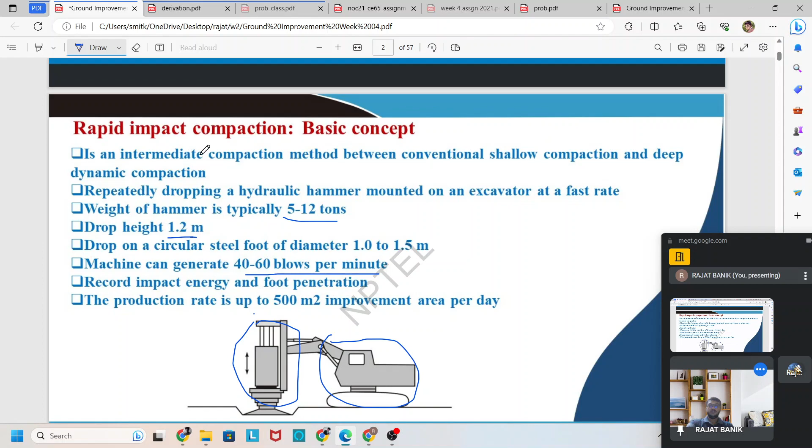We achieve our targeted improvement very rapidly, with blow rates of 40 to 60 blows per minute at one point. So the energy transfer is very high, and the ground is quickly improved to that depth. This method is very suitable in terms of cost when the available construction time is very less, so we can apply this type of test, the rapid impact compaction.

Coming to the next slide, we discuss the suitability, application, and advantages and disadvantages. It is suitable for granular geomaterial, meaning cohesionless geomaterial like gravel, sand, or uncontrolled fill, and also sometimes industrial and mine waste, used to minimize the collapsible potential of the loess.

When we apply the rapid impact compaction test, we stabilize the ground through vibration. We rapidly impact one point, generating vibration there. Through vibration, if there is any potential for the soil to collapse, as in the case of loose soil, we stabilize the ground before construction through vibration, so after construction there is no possibility of collapsible soil behavior. For that reason, this test is very suitable.

This test is also suitable when we want to improve the ground up to 6 meters deep. When our target is 6 meters, or commonly 3 to 4 meters, then we can use this type of test.

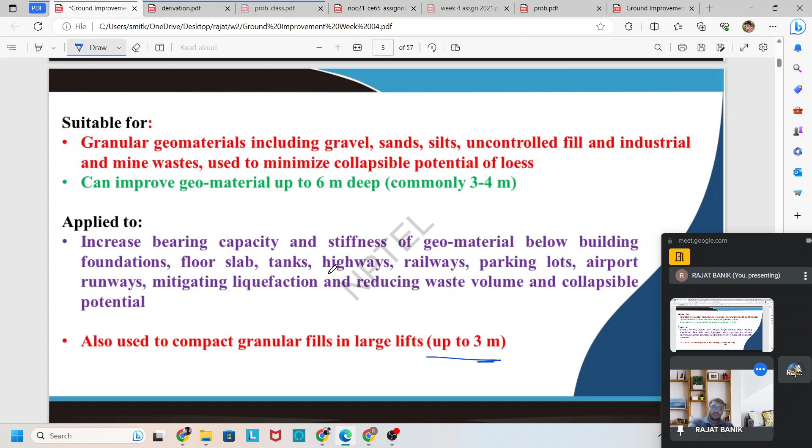Coming to the next slide, it is discussed here the advantages and disadvantages. In advantage, it is said that it is very fast and much more controlled compared to deep dynamic compaction. Fast in the sense that we are applying the energy very fast, by 40 to 60 blows per minute, so it is very fast as compared to the deep method.

It can take one blow and then another blow in between. Then we take 5 to 10 minutes to arrange this test again.

Then it is a much more controlled way. Why is it a more controlled way? The arrangement of this instrument is very small, and the impact point is fixed through a steel plate, and we impact the energy above this steel plate only. So we can already decide, and due to the drop height being very less, we are actually generating a specified point. The energy is transferred through a specified point, so this is the fixed point through which we transfer the energy.

But in case of deep dynamic compaction, a very large arrangement is required, and also the height of fall and weight is very large. So it may not be possible that the impact point remains the same as already defined for the next drop. So in this case, rapid impact compaction fulfills our requirement as it is fast and much more controlled.

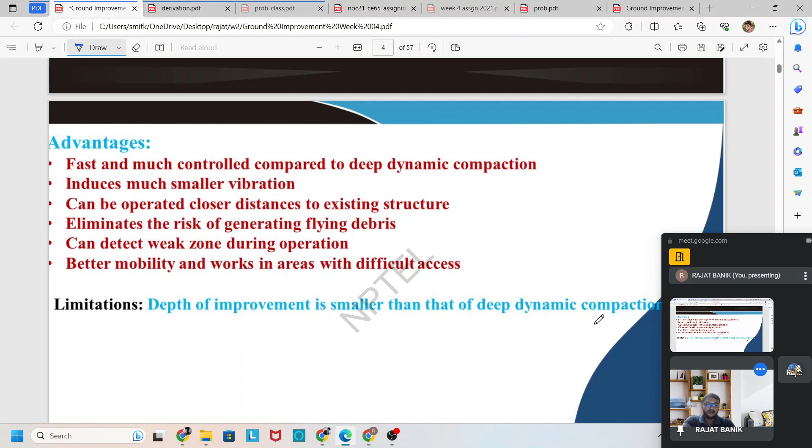Coming to the next slide, we now discuss the design considerations: what are the different aspects regarding designing the rapid impact test.

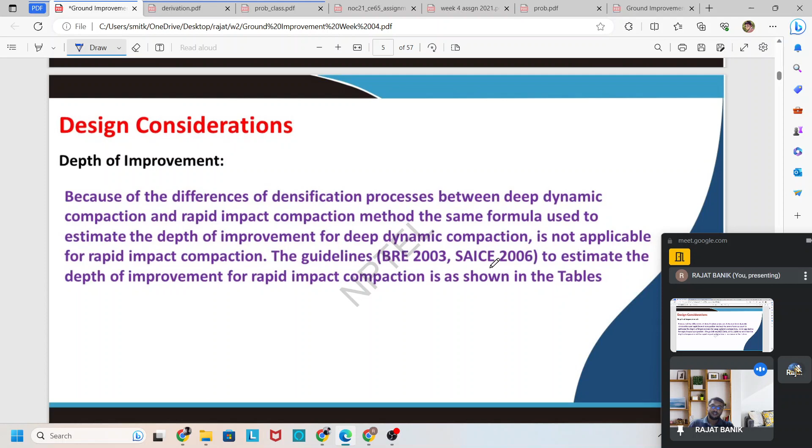The first one is depth of improvement. Because the technique and procedure is different from deep dynamic compaction, the rapid impact depth of improvement is different, and the same formula used in deep dynamic compaction is not used. Because of this, a different procedure and technique is used to densify the soil in rapid impact compaction. But there are one or two guidelines to estimate the depth of improvement, given by BRE 2003 and SAICE 2006. In the next table, to find the depth of improvement for different geomaterials, a table is given showing how much applied energy is required to achieve that depth of improvement.

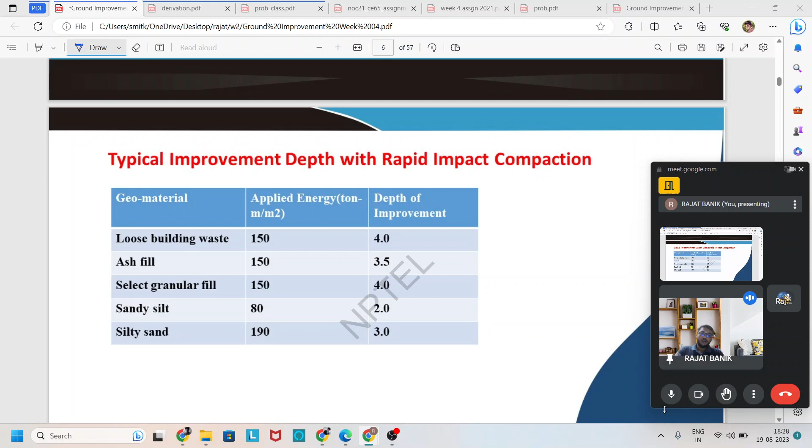The first one shown is loose building waste: the applied energy is about 150 and the depth of improvement is about 4 meters, all units in meters. In ash fill, the applied energy required is 150 to improve the ground up to 3.5 meters. For granular fill, the applied energy is also 150, but the depth of improvement is 4 meters.

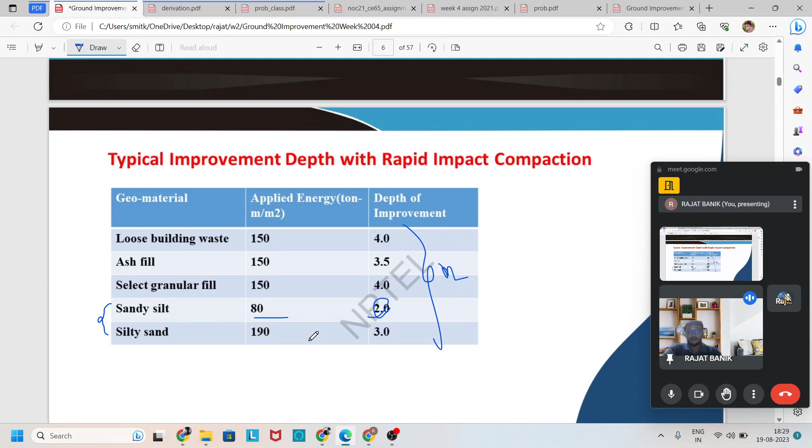For sandy silt, don't confuse it with silty sand — both are different in nature. In sandy silt, an applied energy of 80 ton-meter per meter square is required to improve the ground up to 2 meters. In silty sand, it requires up to 190 ton-meter per meter square to improve the ground up to 3 meters. So by this table, we decide our targeted improvement area for the given geomaterial, and then apply that much energy by weight and drop height to the ground.

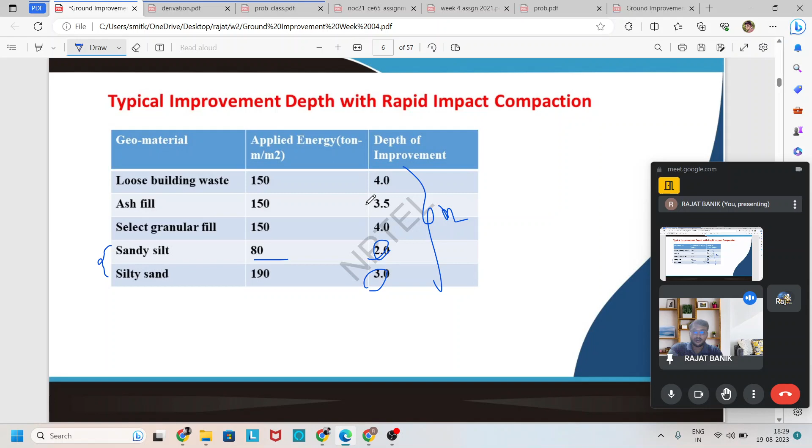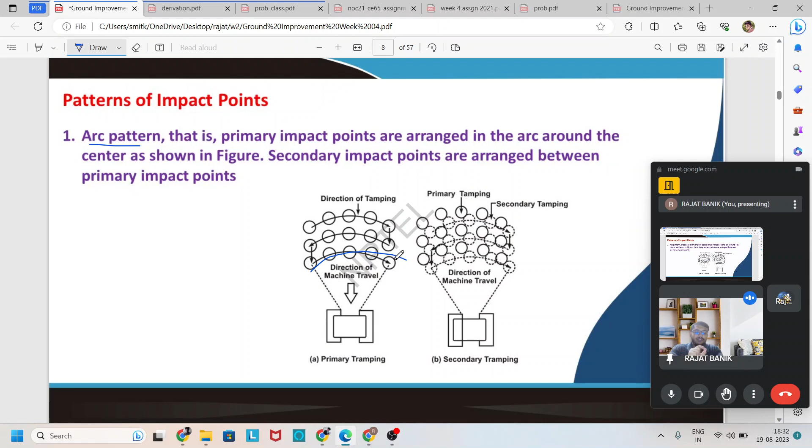After that we apply the secondary pattern, in between the primary pattern, and secondary points are generated like this. Then we apply tertiary points, in between the secondary impact points, like that.

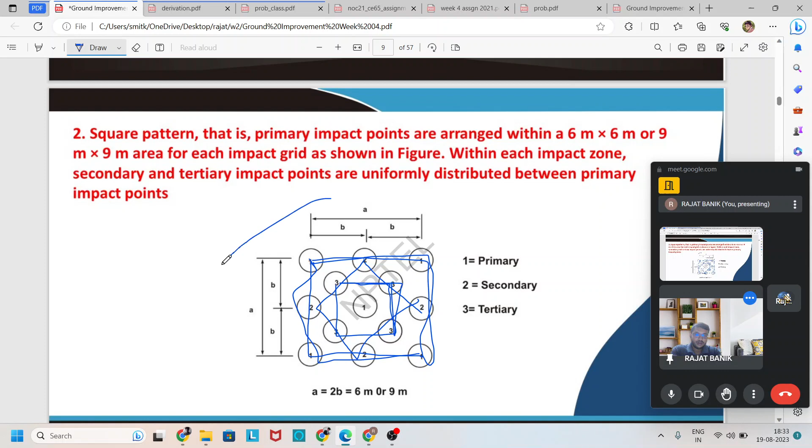So an area of A by A meters is improved. Like that, another A by A area is improved, and continuously we keep improving the ground till the whole area is covered.

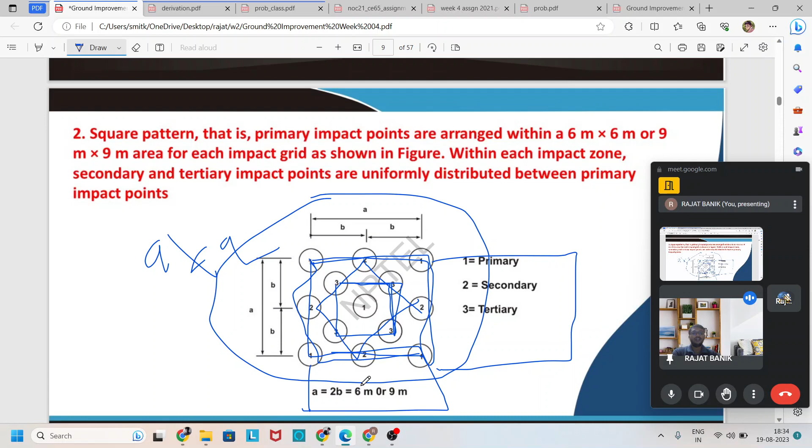Then you can see this another type of pattern: it is a triangular pattern, like that.

It is said that no ironing pass is needed in rapid impact compaction, since rapid impact compaction is similar to dynamic compaction but with low energy and close spacing. However, for leveling purposes and densifying the geomaterial near the surface, compaction by roller is often needed.

That means it is said that no ironing pass is needed here, which is needed in deep dynamic compaction. In deep dynamic compaction, the applied energy is very large and the spacing between impact points is also large, so there is a crater formed which is quite deep below the surrounding ground. So we need the ironing pass to level the ground for deep dynamic compaction.

But in case of rapid impact compaction, we apply a steel plate on the ground and then above the steel plate we apply the energy, and the spacing between impact points is also less than in deep dynamic compaction. So the distribution of energy is quite uniform, and the ground depression is also quite uniform.

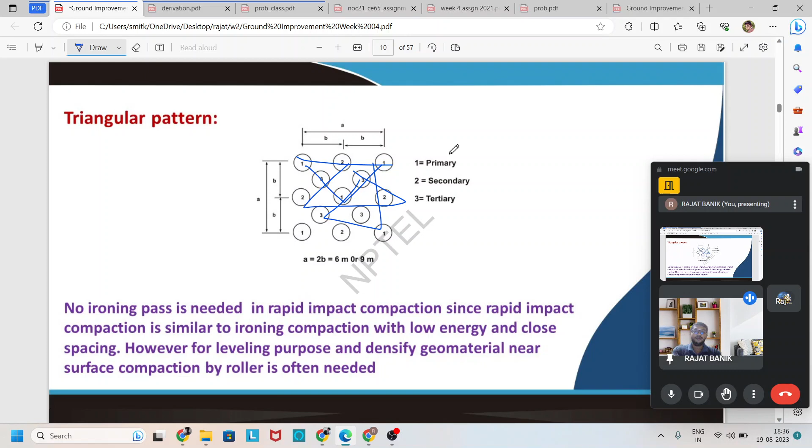Coming to the next slide, another design aspect is the number of blows. We can find this out using an equation already given, which is the same as for deep dynamic compaction. We have already seen this type of formula.

By this formula, we can easily find out how many drops are needed for one impact point for a particular applied energy. To determine the number of drops, we need to know what type of soil is present, how much energy is needed to achieve the targeted improved depth, how much weight is used for the applied energy, and what the height of fall is.

We also consider the equivalent influence area, meaning how much area is covered and compacted by that much energy. So by this we can easily find out how many drops are needed.

That means the applied energy equals the number of drops times the height of fall of the hammer, divided by the influence area. The influence area is nothing but the spacing squared, if we apply the square pattern. So by that we can easily find out the number of drops.

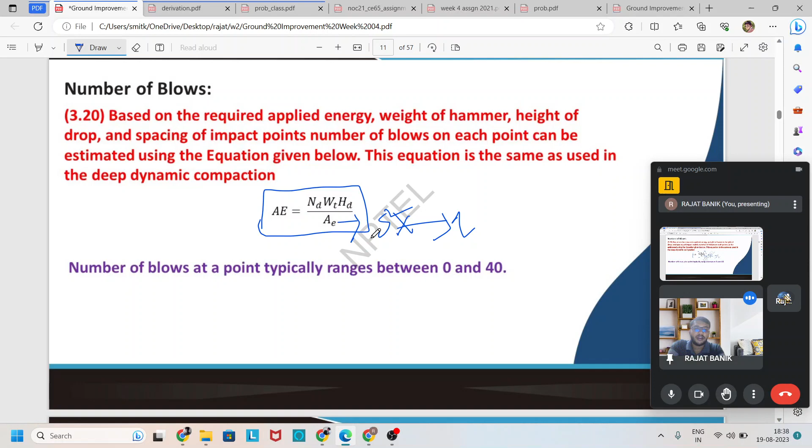We can see that, we already discussed about that. So we easily understood or we easily shown that by this formula we can easily find out the number of blows per minute, or what are the blows for per impact point, how much blows are needed.

Coming to the next design consideration, this is groundwater. Groundwater is also most important for the different types of ground improvement technique. Here also it is a governing factor because like deep dynamic compaction, groundwater is problematic, and it is also problematic to the rapid impact compaction.

It is because when we apply the energy to the field, if the ground is saturated or if the groundwater table is close to the ground, there may be seeping out of water from the ground due to the applied energy or vibration. So this may not be suitable for the construction site. We need to dewater the ground before applying the rapid impact compaction test. But if the groundwater table is below 1 meter depth, then this technique is quite suitable.

So it is said that, as in deep dynamic compaction, a high degree of saturation geomaterial near the ground surface affects the rapid impact compaction, and the depth of groundwater table at 1 meter is the minimum requirement for rapid impact compaction. If the groundwater table is too close to the ground surface, dewatering or additional fill should be implemented prior to the compaction to suit the construction requirement.

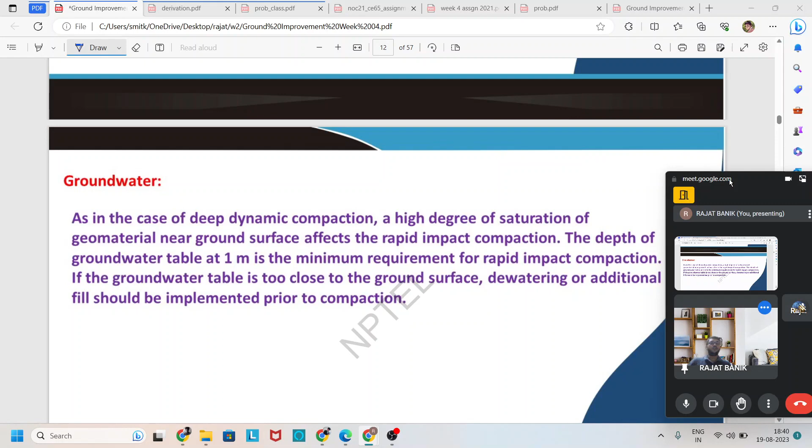Coming to the next slide in module 4, lecture 17, here it is given that, like other deep dynamic compaction, here also we consider the environmental impact. That means we consider the vibration and noise - how much vibration or noise is created during this rapid impact compaction, and whether it is suitable to the adjacent site, construction site, or structure or not.

Based on that, we conduct the rapid impact compaction test. If it is exceeding and does not fulfill our requirement, then we terminate the rapid impact compaction test. So it is found out how the environmental aspect is based on vibration and noise - it is found out based on peak particle velocity.

The peak particle velocity is generated when the vibration is created. So based on some empirical formula, we can find out or define the peak particle velocity. So here it is said that, like deep dynamic compaction, rapid impact compaction on ground induces environmental impact, mostly vibration and noise. This fact has to be considered in the selection of a suitable ground improvement technique.

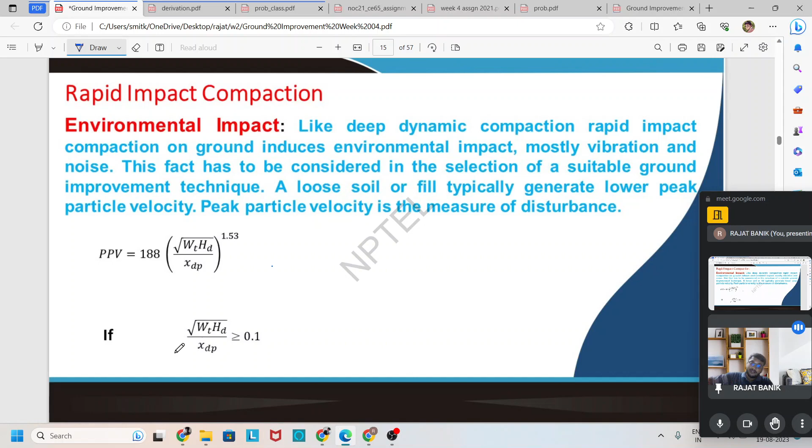So if you can see the term in the bracket, this is called the scale energy factor. When the scale energy factor is more, we can easily say, based on this formula, that the peak particle velocity also increases. Two formulas are used based on the scale energy factor. When the scale energy factor is greater than or equal to 0.1, we apply the first formula: peak particle velocity equals 188 times scale energy factor to the power 1.53. If it is less than 0.1, we use another formula: 36 times scale energy factor to the power 0.79.

Give me some seconds, I will join.

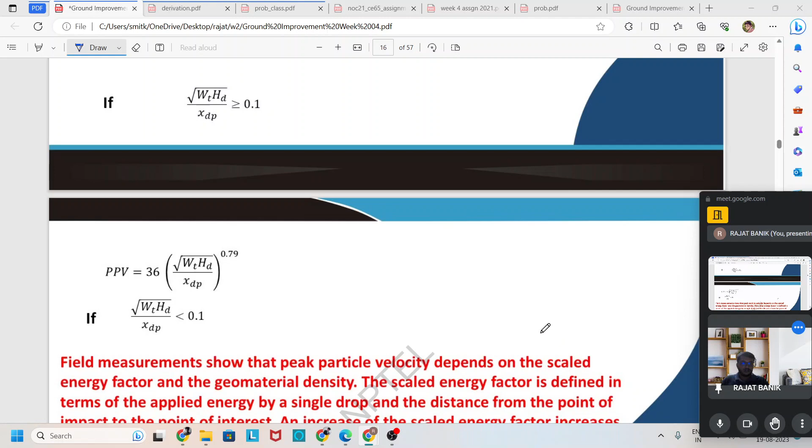Sorry for the interruption. So what I discussed here is about peak particle velocity. By scale energy factor, we easily find out the peak particle velocity based on two empirical formulas. If the scale energy factor is greater than 0.1, then we use the first one. If it is less than 0.1, we use the second one.

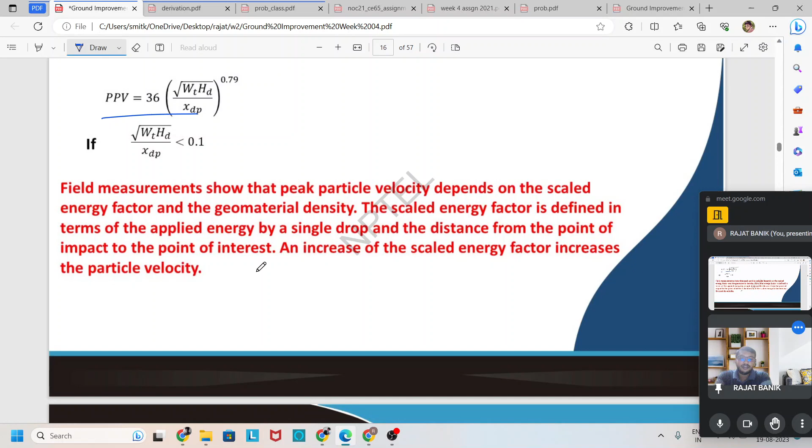So here is one point about peak particle velocity - it depends on the scale energy factor and the geomaterial density. That means if the sand is very dense, then it transfers very high energy to the surrounding soil.

If it is loose, then the energy transfer is less. Based on the scale energy factor, if the height of drop and weight of hammer is large, then the energy transfer to the surrounding soil is also high. If the distance between the impact point and the surrounding structure is less, the transfer energy is also very high. So the peak particle velocity mainly depends on the scale energy factor and geomaterial density.

The scale energy factor is defined in terms of the applied energy by a single drop and the distance from the point of impact to the point of interest. As the scale energy factor increases, the peak particle velocity increases. This is clearly seen through this formula.

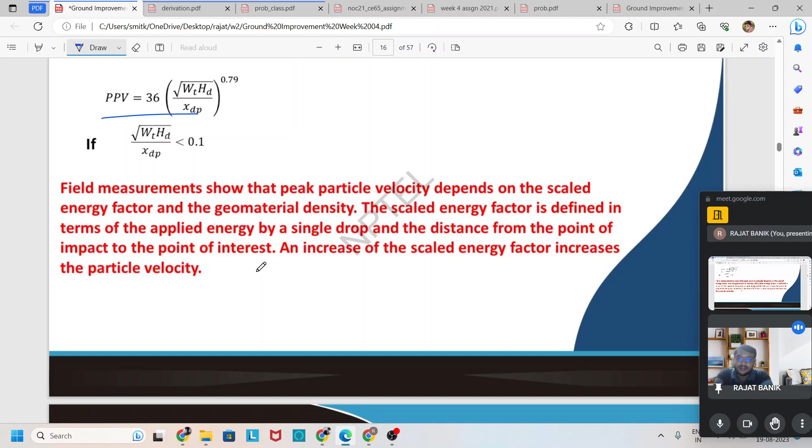In the next slide, there are some points about peak particle velocity. The first is that the scale energy factor is greater than 0.1 for most rapid impact compaction. Comparison between the equations for the two cases shows that rapid impact compaction produces greater peak particle velocity than deep dynamic compaction at the same scale energy factor.

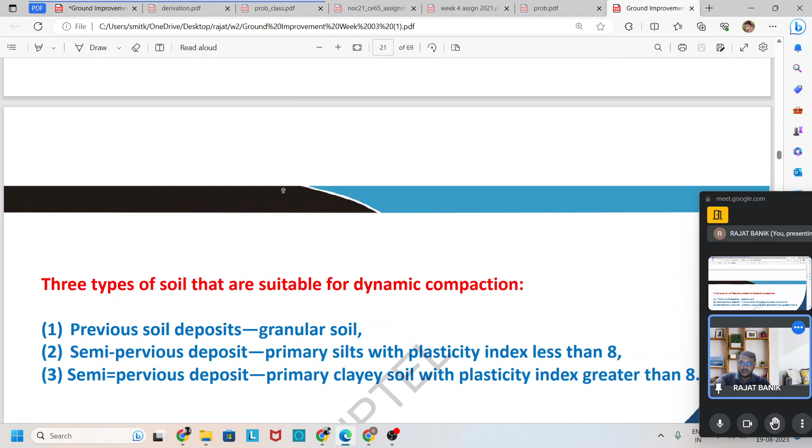That means, if you remember from previous lectures, we discussed the peak particle velocity formula for deep dynamic compaction. Let me take a moment to go through that previous formula. Please wait a few seconds.

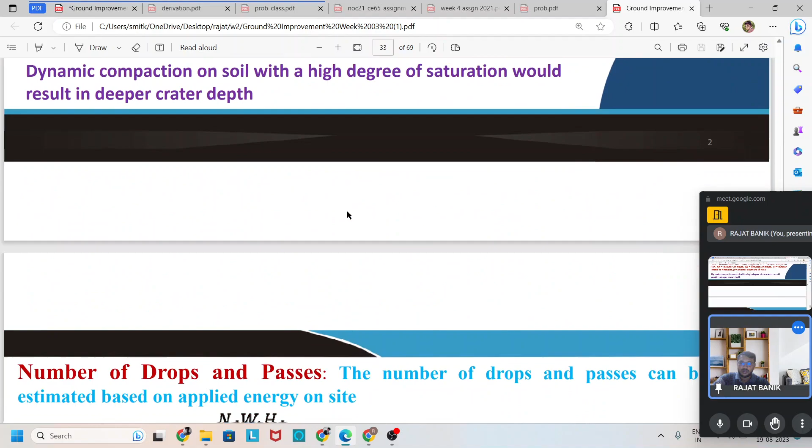For deep dynamic compaction, the formula is the scale factor to the power 1.4, multiplied by 70. But in case of rapid impact compaction, the formula is the scale factor to the power 1.53, multiplied by 188.

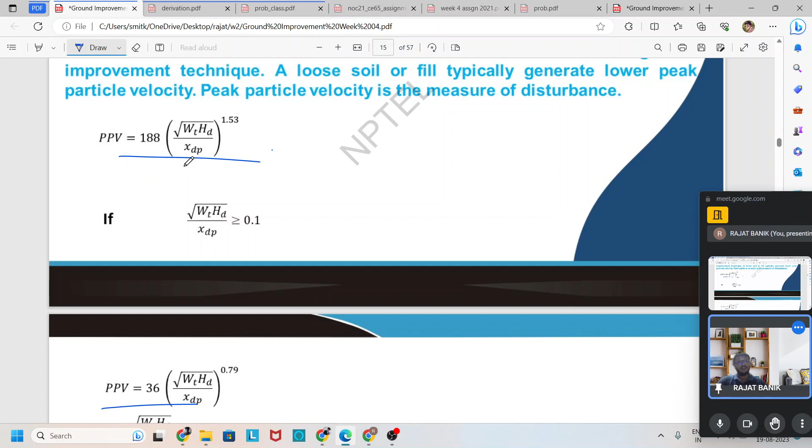So if the scale factor is the same for both cases, the peak particle velocity generated by rapid impact compaction is greater than that of deep dynamic compaction, for the same scale factor. Based on this formula, we can easily say this.

The second point discusses that the greater peak particle velocity induced by rapid impact compaction results from the fact that the steel foot is always in contact with the ground. This transfers the impact energy to the ground more efficiently.

If we don't apply the steel plate, the ground surface is quite undulated, not level. So when applying the hammering, due to this improper leveling of the ground, the applied energy is not uniformly distributed to the surrounding ground. If we apply the steel plate before hammering, it distributes the energy uniformly to the ground, so more energy is transferred. The test is more efficient than when we don't use the steel plate.

So it should be remembered that during this test, the steel foot is always in contact with the ground. The third point compares this with deep dynamic compaction, stating that rapid impact compaction produces greater peak particle velocity than deep dynamic compaction at the same scale factor.

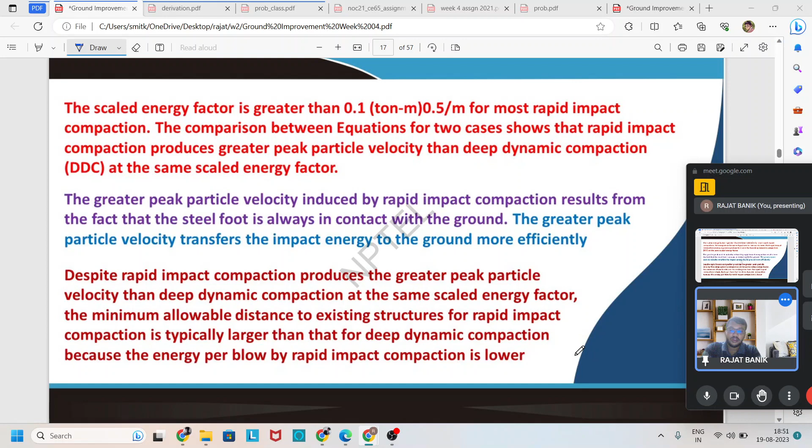Coming to the next slide, one person has reported that the induced vibration frequency ranges from 9 to 15 Hz for the rapid impact compaction test, but in case of deep dynamic compaction test, it is between 6 to 10 Hz. So we easily see that due to the induced vibration, the frequency is higher than deep dynamic compaction in case of the rapid impact test. Due to high frequency, we know that less vibration is generated, so we can easily use this test very near to the existing structure to improve the ground.

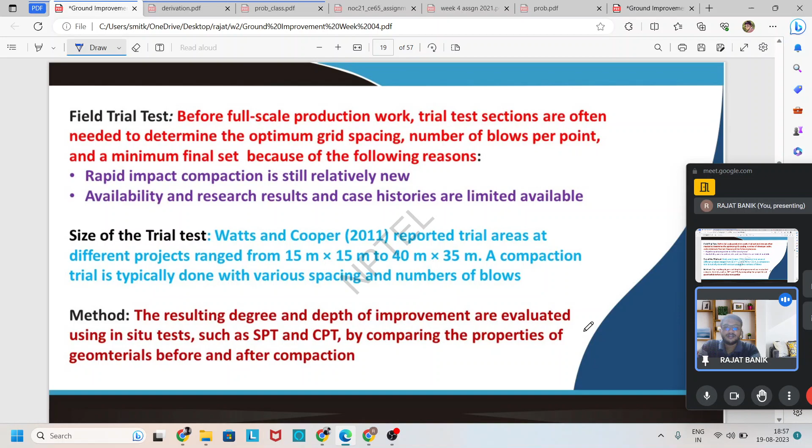So like this, through field trial tests, we decide our spacing, number of blows, and minimum final set for the rapid impact compaction test.

Coming to the next slide, here different types of design parameters are given, which govern the rapid impact test.

There are few points discussed here. One is geomaterial type. We already discussed in the first slide that this method is suitable for granular material, that means cohesionless soil. It is not suitable for fine grained soil. Why is it not suitable?

Because due to the vibration, in cohesionless soil the particle to particle friction or attraction is less, so when we apply the rapid impact test, it is more suitable for cohesionless soil. But in cohesive soil, the particle to particle friction or force is more. So applying the rapid compaction test is not suitable to overcome this particle to particle attraction force. So the rapid compaction test depends on the geomaterial type.

Then, as the second point, the depth of groundwater table also influences the rapid impact test. We know that if the depth of groundwater table is near to the ground surface, there may be some problem. After applying the rapid impact test, water may come out from the ground, making it difficult to handle the instrument at the construction site. So this is also a governing factor. Before doing the rapid impact compaction test, we need to dewater the site.

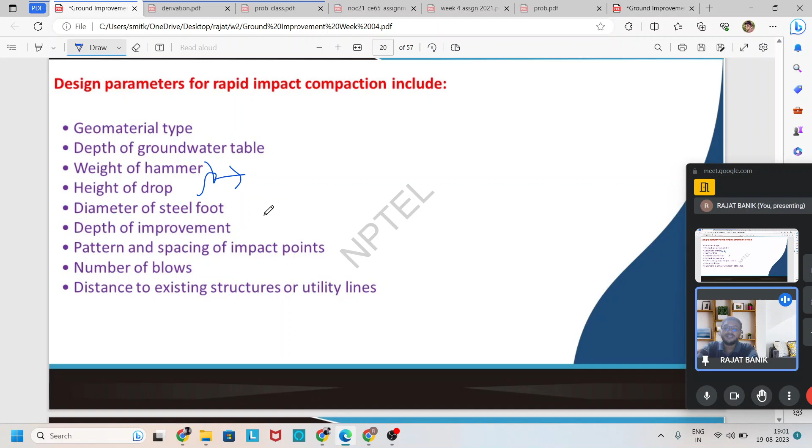Then there is the distance to the existing structure or utility lines. Since the rapid impact compaction test generates less vibration, we can easily use this test very near to existing structures. So this is also a governing factor.

The first procedure is to determine whether the rapid impact compaction is suitable. This is determined by whether our depth of improvement is between 4 to 6 meters, and whether the geomaterial type is suitable, that is granular or cohesionless soil. If so, then we apply this test.

Then we select the depth of improvement, how much depth we need, whether it is 6 meters or 4 meters. If it is 6 meters, more applied energy is required. If it is 4 meters, less applied energy is required compared to the 6 meter depth of improvement.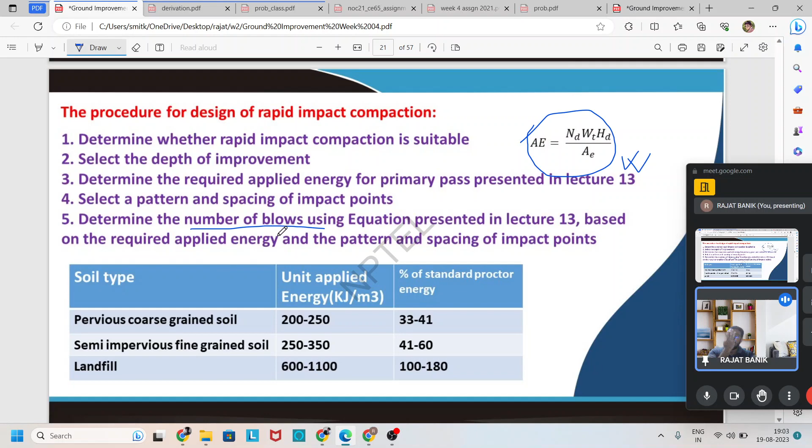In the next slide, after determining the number of blows, for safety purposes we determine the peak particle velocity using the scale energy factor, to check whether the peak particle velocity exceeds our targeted value or not. If it exceeds the targeted value, then the rapid impact test is terminated, meaning no further test is needed or conducted to improve the ground.

We know that peak particle velocity indirectly shows the environmental impact. We already showed one table that based on the peak particle velocity, for different structures, there is some threshold value fixed. If it exceeds this threshold value, we terminate this test. If it is in between or less than the peak particle velocity given in this table for different types of structures, then we conduct further rapid impact tests to improve the ground.

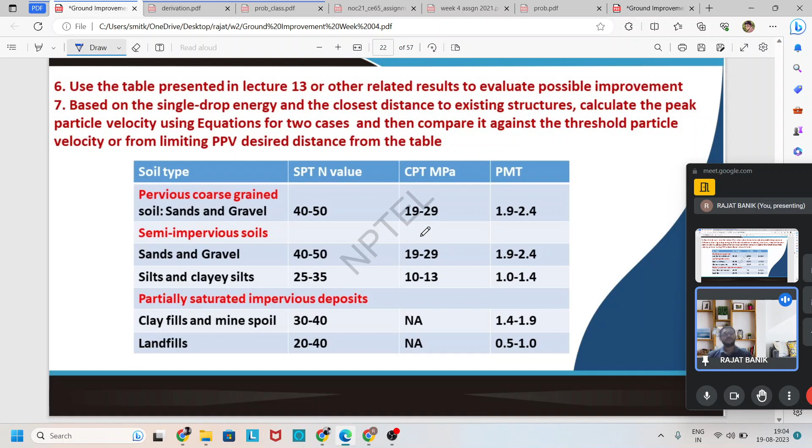So here we can see the same formula is given for peak particle velocity, and the same table is given once again. We see that if it is exceeding 19 mm per second for dry wall, the peak particle velocity test is rejected for this particular site. If it is less than 19 mm per second, then it goes for other tests, or for rapid impact to improve the ground further.

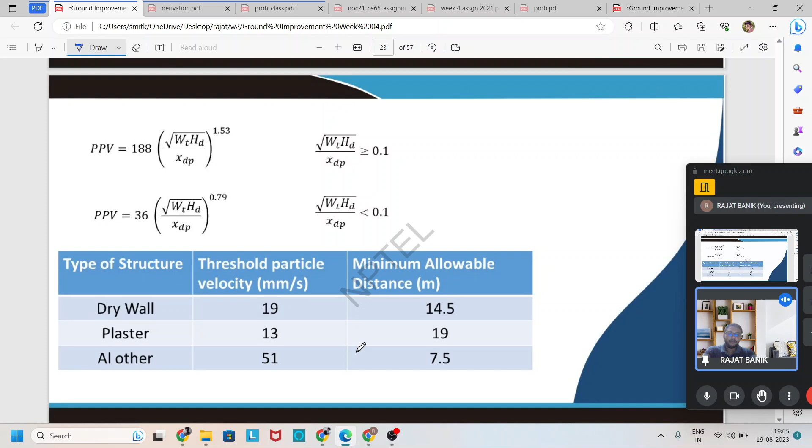So for different types of structures, different threshold values are given for peak particle velocity, and also different minimum distances are given for how much distance should be there between the impact point and the nearby structure.

So in this way, module 4 lecture 17 is completed.

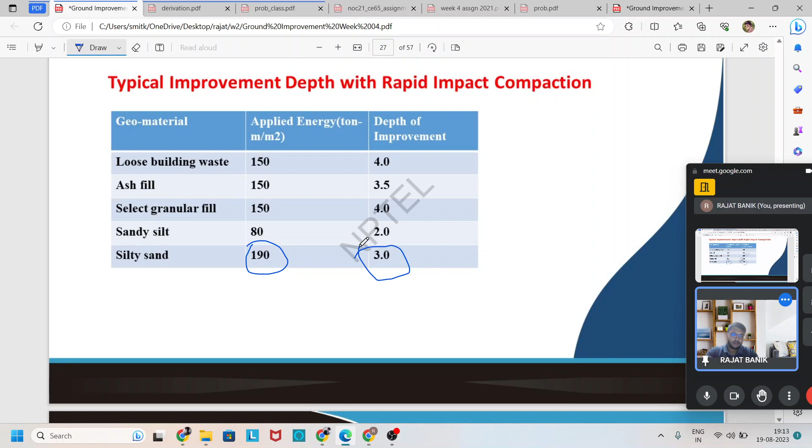To try to solve this problem, I direct you to another slide. First, you see that the applied energy, the targeted geomaterial, is our silty sand. For silty sand, impact energy is given as 190 ton-meter per meter square. But our depth of improvement is 4 meter. A table is given for silty sand - when we apply rapid impact compaction, the applied energy of 190 corresponds to a depth of improvement of 3 meter. But here it is given as 4 meter. So more energy is required as compared to the given energy.

So how do we find it? Now we direct to another slide. We find this by the unitary method. That means for 3 meter depth, applied energy is 190. Like that, for 1 meter, how much is it, and for 4 meter, what is this? It is found that for 4 meter, it is about 253 ton-meter per meter square.

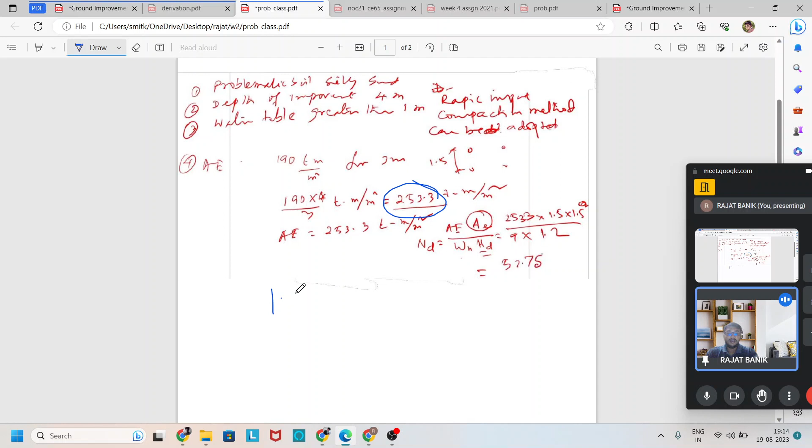And we consider that our spacing is 1.5 meter by 1.5 meter. That means from one impact point to another impact point, the center to center distance is about 1.5 meter. By this spacing, we consider a square pattern, and by this spacing we can easily find out the influence area - that means nothing but a square of the spacing. So you can easily find out.

And after that, using this influence area, we easily find out the number of drops by this formula. It is a rearrangement of this type of formula: applied energy is equal to number of drops into weight of hammer into drop height, whole divided by influence area AE. By rearranging this formula we can easily find out the number of drops. Here it is found that the number of drops is about 53 for each impact point.

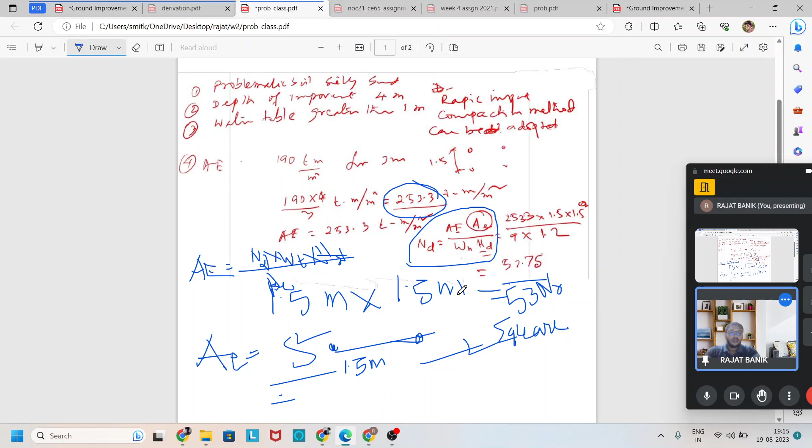Then we find out this formula for considering the environmental impact, whether this test or given problem is suitable for our existing structure or not. Here it is, if you see that the existing structure is about 7.5 meter distance.

By this distance and applied energy, we can easily find out from this formula our peak particle velocity, which indirectly gives the environmental impact through vibration and noise. We know that for all other types of structure, the peak particle velocity should be limited to 51 mm per second. But in our case, this formula gives about 53.2, which is slightly greater than the threshold value.

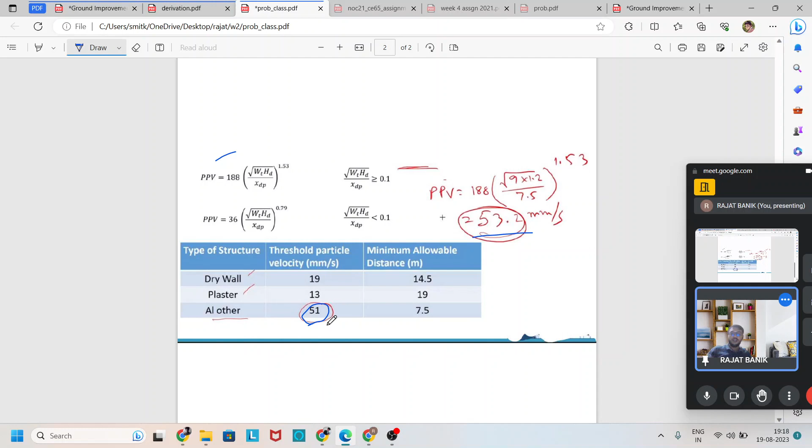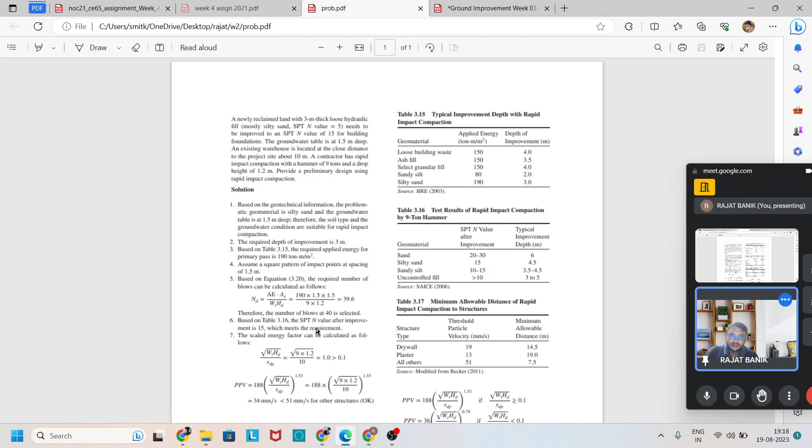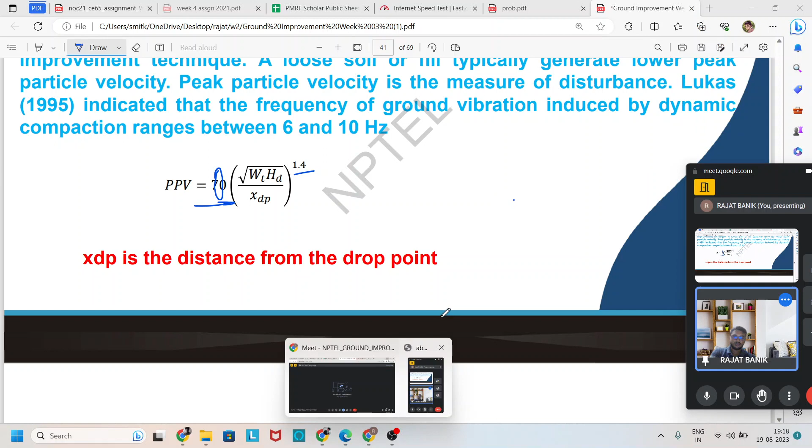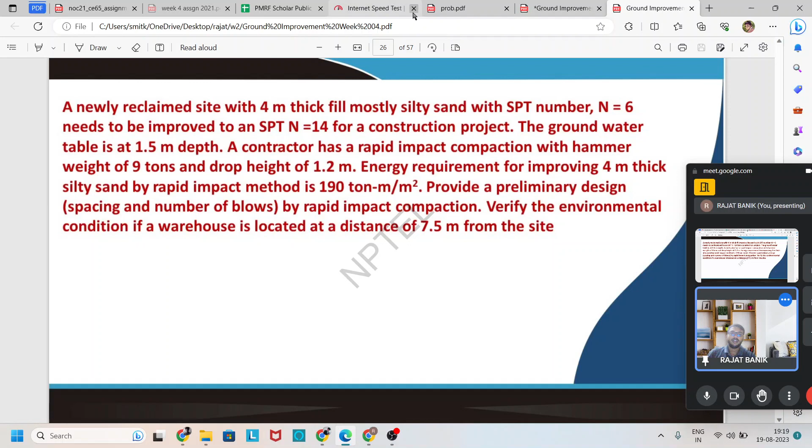Sorry about that. Sorry, I cannot find my... sorry, I mistakenly deleted or closed the tab.

So now coming to the next slide, it is about the construction - how we apply the rapid impact test in the ground. First step is we do the design, then we do the trial, and after that we discuss how it is actually applied in the field.

For construction of the rapid impact test, prior to compaction or stabilization, we need to prepare the ground. This is done by removing large objects, leveling the ground, dewatering, or filling existing ponds and depressed areas. Dewatering lowers the groundwater level if it is within 1 meter of the ground. Then leveling the site avoids ponding of water, and removal of large debris or rubble uncovered during leveling avoids interference in compaction work.

Next, we discuss building the isolation trench. This is built when the vibration due to the rapid impact compaction is quite large, to reduce or minimize transfer to the existing structure. A trench is created surrounding the test site so that the further transfer of vibration is not possible due to the gap. The trench should be 2 to 3 meters deep and 1 meter wide, built in between or surrounding the existing structure to reduce the vibration.

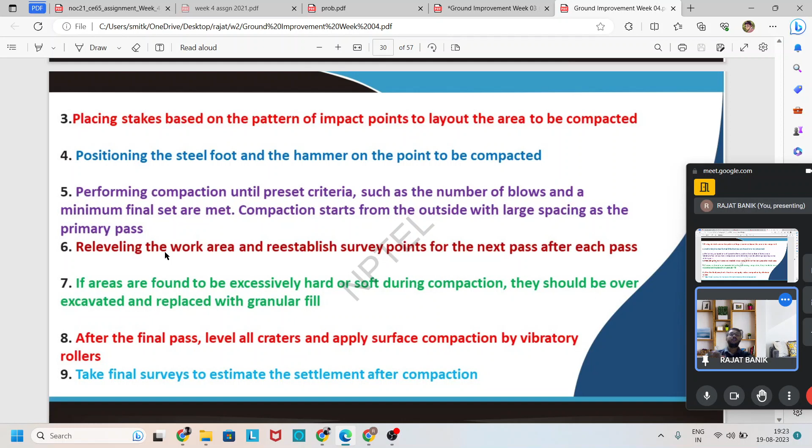After each impact point, we re-level the work area and re-establish the survey point for the next pass. If the area is found to be extremely hard or soft, we excavate it and replace it with granular fill. In the final pass, we level all the craters and apply surface compaction by vibratory roller, then take the final survey to estimate the settlement after compaction. This is how we apply rapid impact compaction in the real field.

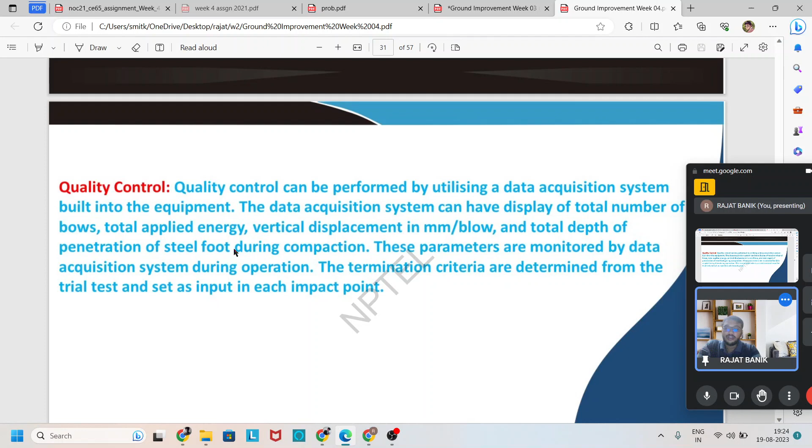Coming to the next slide, it is about quality control. During the rapid impact test, we need to check and control the quality. This is performed using a data acquisition system already built into the equipment or excavator. It records the number of blows, total energy, vertical displacement, and total depth of penetration. Using these values, we monitor our test at each point. If it matches our targeted value, we move to another point; if not, further improvement is needed. This is how we control quality on site.

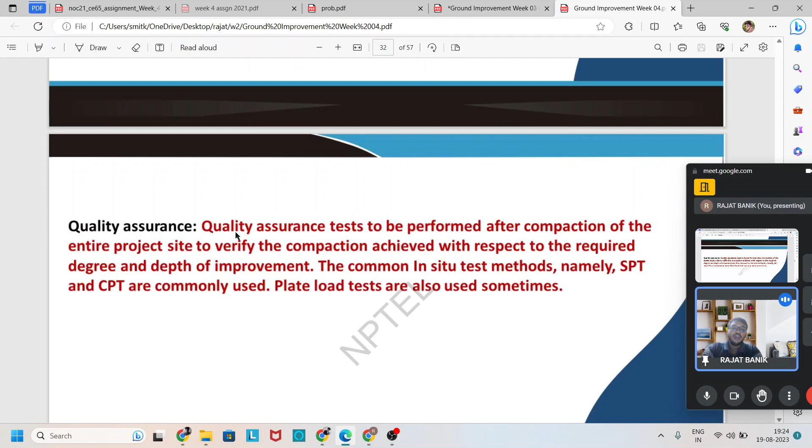Another aspect is quality assurance. Quality assurance means that after each test or each rapid ground improvement technique pass, we go to some in-situ test like SPT or CPT. We also do SPT or CPT before, to measure the ground strength, and after, to match our targeted value. If it matches, the test is okay; if not, further improvement is needed. Like that, we use SPT and CPT tests to assure the quality of the rapid impact test.

So this module is over. Now we start module 5, vibrocompaction.

Vibrocompaction is another type of ground improvement technique, and it is also a deep ground improvement technique. Like rapid impact compaction and deep dynamic compaction, these tests are quite similar but limited to a certain depth - deep dynamic compaction up to 15 meters, rapid impact compaction up to 4 to 6 meters. But in vibrocompaction, we densify the soil to a depth of improvement of about 40 meters, mostly around 20 meters, but we can go up to 40 meters. So it is quite popular for densifying soil at greater depths, and more effective than the other ground improvement techniques discussed in this session.

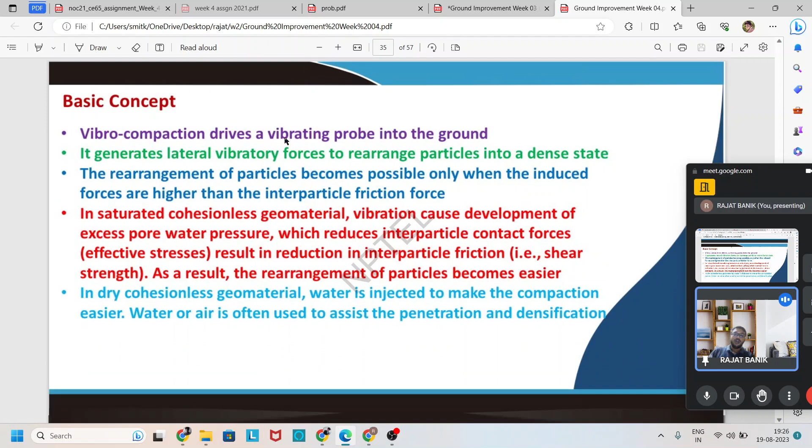Some basic concepts about vibrocompaction: we drive a vibrating probe into the ground, like a rod driven during vibration, and then apply vibratory force to rearrange the particles into a denser state. What actually happens is we overcome the particle-to-particle friction force, that is, the bond between particles is overcome by vibration. Due to this vibration, particle-to-particle interaction is broken, and the particles come closer than before.

This test is more suitable for saturated cohesionless geomaterial. In saturated cohesionless soil, vibration causes development of excess pore pressure, which generates liquefaction. Due to this liquefaction, the interparticle contact force is reduced, resulting in reduction of interparticle friction or shear strength, and the particles rearrange and come much closer together. In dry cohesionless soil, water is injected to make compaction easier, since this water also generates excess pore pressure and liquefaction, making it easier to break the particle-to-particle friction and easier to compact the ground.

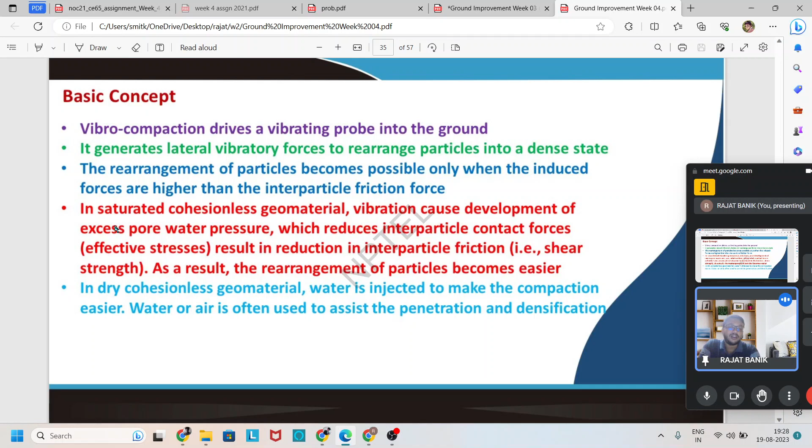Moving to the second slide: backfill is often used to improve the degree of vibrocompaction. This technique is also called vibroflotation. Backfill is needed because when we apply vibration, some subsidence or void space is created, since the particles, previously arranged with interparticle bonds, become more closely packed than before, reducing volume and creating voids or subsidence. To address this, we backfill good material to fill the void and again apply vibration. This technique, called vibroflotation, was first developed in Germany in 1930s and became successful and popular worldwide.

So vibroflotation is nothing but vibrocompaction, which we apply in two ways: bottom vibrator and top vibrator. In the bottom vibrator, the vibrator is attached at the bottom of the probe, and vibration occurs by rotation of an eccentric weight at the bottom. In the top vibrator, the vibrator is attached at the top of the probe, applying vibration to the ground in a similar manner, using rotation of an eccentric weight to create vibration.

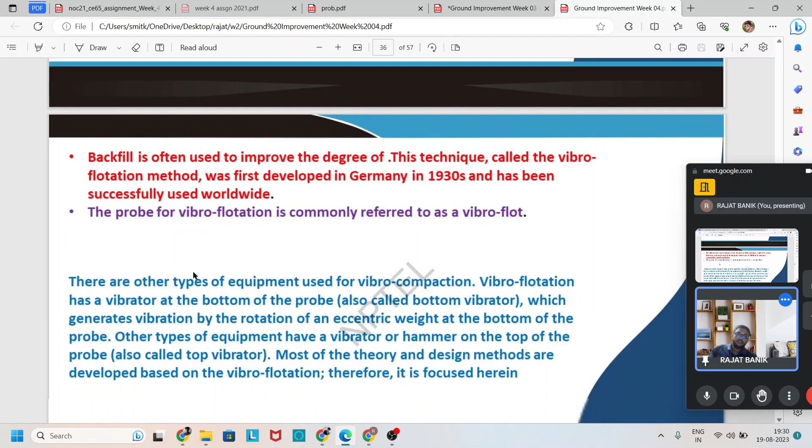Moving to the next slide, here is a schematic diagram for vibrocompaction. First we insert the vibrating probe into the ground. After a certain depth, we apply vibration, and as voids or volume decrease, we apply backfill material. Then we again apply vibration, and in this way we raise it up to ground level, improving the ground. That's how we apply vibrocompaction, also called vibroflotation or vibroflot.

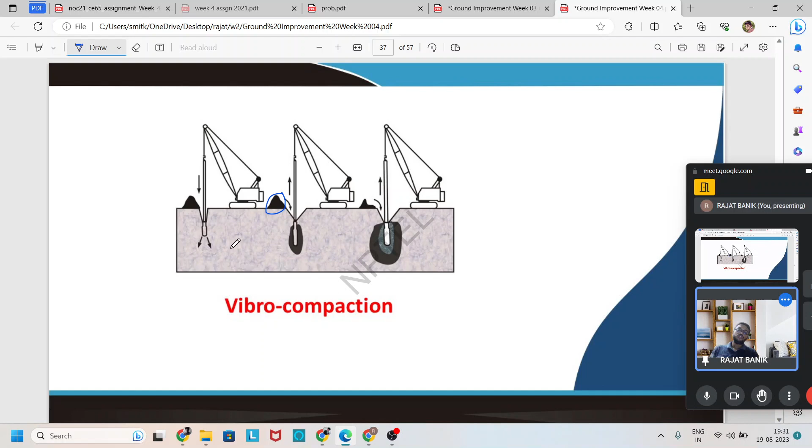Now come to suitability. Vibro compaction is suitable for densifying deep deposits of cohesionless geomaterial, up to a fine content of 20%, but less than 3 to 4% clay particles. This technique is mostly suitable for cohesionless soil with less fine content and very less clay particles.

Because if fine content reduces the void space, in vibrocompaction of saturated cohesionless soil, we generate excess pore water pressure. Due to this excess pore water pressure, liquefaction happens. Due to this liquefaction, the interparticle bond or friction is reduced and particles come very closer together.

But in case of fine particles, if there is presence of more fine content, the permeability is reduced and the excess pore water pressure is not easily dissipated. So there is some problem when clay particles are present. So it is more suitable for cohesionless soil with less clay particles, about 2 to 3%.

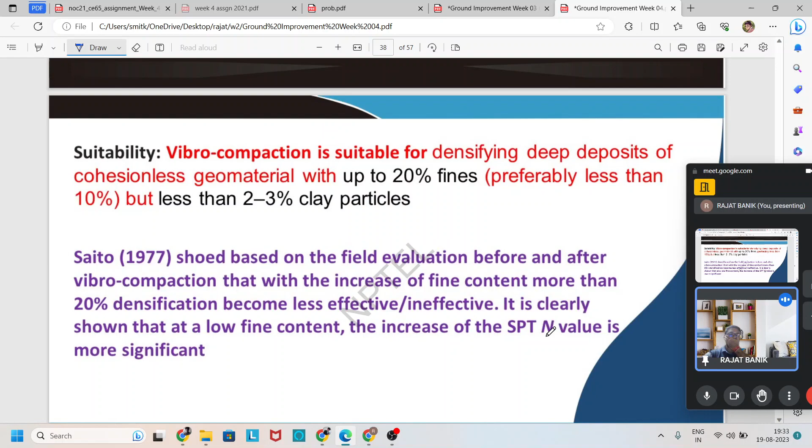So one scientist, Saito, gave a chart or graph about the percentage of fines based on the SPT number. Here the SPT number is used to indicate the depth of improvement. The more the SPT number, the more depth of improvement or more improvement is happening. This chart is given in the next slide.

You can see it is SPT versus fine content. Before the improvement, the SPT value is quite similar for all types of fine content. After the vibro compaction, we can see the SPT number increasing, like 20 to 30.

The SPT number increases about 20 to 30 for less fine content. You can see here the SPT number is about 30, but the fine content is about 3 to 4%. If we increase the fine content, the SPT number decreases, meaning the depth of improvement or ground improvement is decreasing. So we can easily say that fine content affects our improvement.

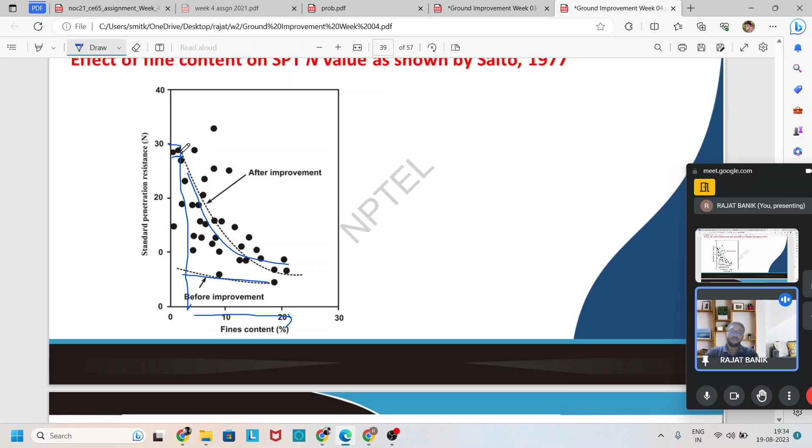So in this test, for vibrocompaction, fine content should be limited to less than 10%, and clay particles should be less than 2 to 3%. If less, then the SPT number is higher, meaning more depth of improvement.

Coming to the next slide, here a chart is given for suitability of vibrocompaction. This chart is the gradation chart, divided into zone A, zone B, zone C, and zone D based on particle size. Zone A is mostly gravel particles. Zone B is from fine gravel to coarser sand. Zone C is between coarse sand and fine sand, and zone D is near silt.

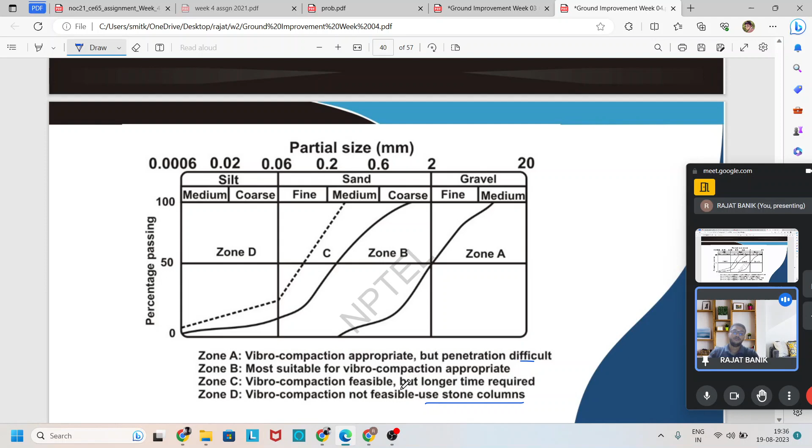It shows that in zone A, vibrocompaction is appropriate but penetration is difficult. Zone B is most suitable, vibrocompaction is appropriate. Zone C, vibrocompaction is feasible but longer time required. Zone D, vibrocompaction is not feasible; we suggest using stone columns instead. We discuss why this happens in the coming slide.

Vibro compaction is most suitable for zone B because most particles there are cohesionless, between fine gravel to fine sand or sometimes coarse sand. So only particle-to-particle friction needs to be broken, no need to overcome cohesion. Less cohesion makes it easier to apply this vibro technique in zone B.

In zone A, it is not feasible because of the large particles present, like gravel, pebble, or cobble. Due to this large particle size, penetration is difficult, so it is not fully suitable in zone A either.

But sometimes it is feasible there. In zone C, it may also be feasible but requires longer time to densify, due to apparent cohesion for unsaturated soil and low permeability for saturated soil. So zone C is also not fully suitable. Only zone B is fully suitable because of its gradation between gravel and fine sand.

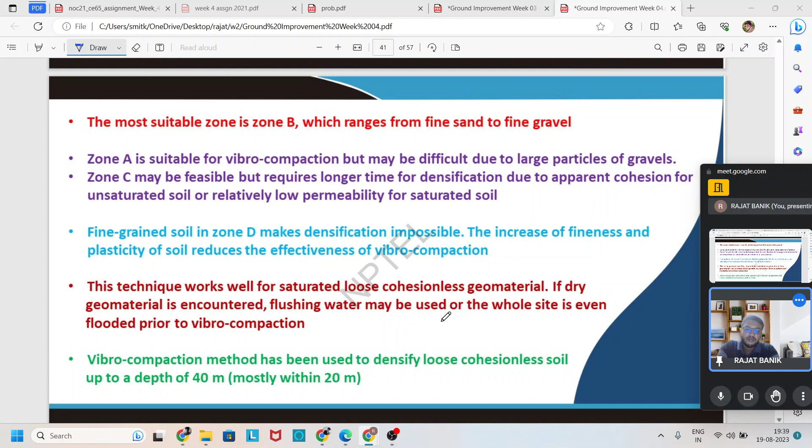Vibrocompaction method has been used to densify loose cohesionless soil up to 40 meters, mostly 20 meters. This is already discussed here.

Coming to the next slide, it is about the applicability of this technique. Like other ground improvement techniques, it increases bearing capacity, reduces settlement, and mitigates liquefaction for a wide variety of projects. But this technique is used for loose cohesionless soil or saturated soil.

There are some projects where it is mostly applicable, like storage tanks, buildings, roadways, dams, and dikes. This technique is most suitable and widely used, and all these techniques are for big projects, meaning the cost of construction required is more.

Also, the risk of building these techniques requires more care. To stabilize this, a big disaster can happen if the ground is not stabilized. So this technique is applied only for big projects where cost of construction is very high and the risk associated is also very high.

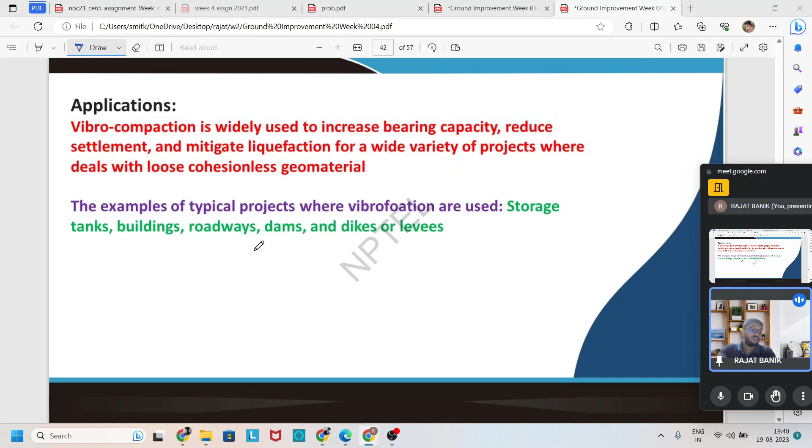Coming to that, we discussed about the advantages and disadvantages already. This technique is very quick, easy, and economical.

Quick in the sense that only one probe is driven into the ground and vibration is generated, and due to this vibration the soil is densified. We raise the probe and vibrate again, and like that we come to the ground surface, very quickly densifying the ground. It's easy too, since only one vibrating probe is required to densify it, and it can be used to improve the geomaterials above or below groundwater.

We discussed shallow compaction, deep dynamic compaction, and rapid impact compaction. All three are not suitable when the groundwater table is near the surface. But in this case, it is suitable in both cases, whether the groundwater table is below or above a certain level. So these are the advantages.

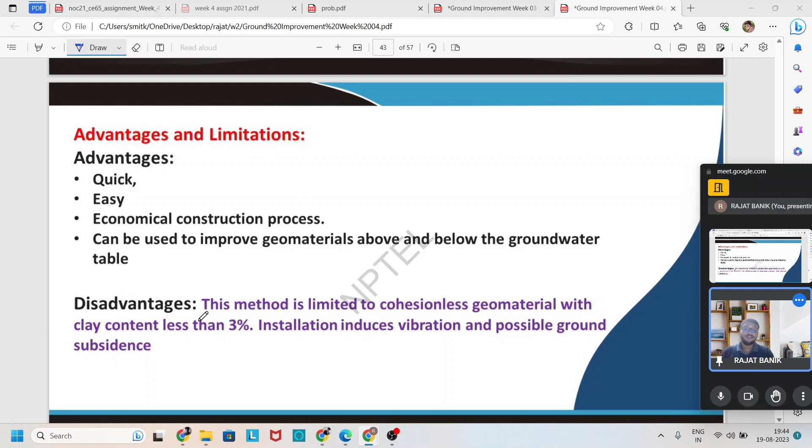Coming to the next slide, we discuss the principle or mechanism of vibrocompaction. Densification of cohesionless soil results from particle rearrangement and volume change by the induced vibratory force. Vibrocompaction induces lateral vibration and vibratory force. The induced vibratory force should be larger than the interparticle friction for rearrangement of particles, and the force attenuates with increasing distance from the compaction point.

Here it is clearly said that in cohesionless granular soil, when we apply vibration, vibratory force is generated. Due to this vibratory force, interparticle friction is reduced or overcome, particle rearrangement happens, the particles come closer, and the ground is compacted.

One scientist, Rodger, reported that a critical acceleration of approximately 0.5g is created, above which dynamic stress induced by dynamic compaction destroys the structure of granular soil. That means a minimum of 0.5g acceleration is needed to apply the vibrocompaction test. When acceleration increases to more than 1.5g, the shear strength of the soil is significantly reduced and the soil becomes fluidized. The particle to particle friction is broken, and the soil comes closer quite easily. Further increasing the acceleration beyond 3g causes soil dilation.

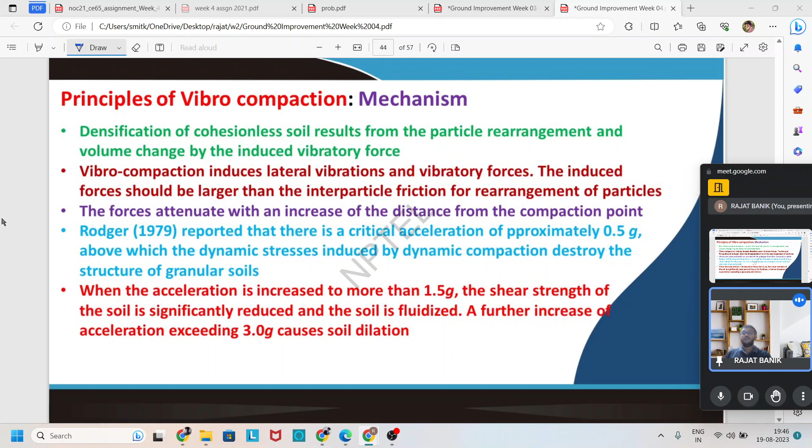This is what happens at each vibro float compaction point. Now we are discussing how it happens, and idealizing the response: what happens to the soil around the vibratory float, and how it occurs near the structure, near the vibratory float.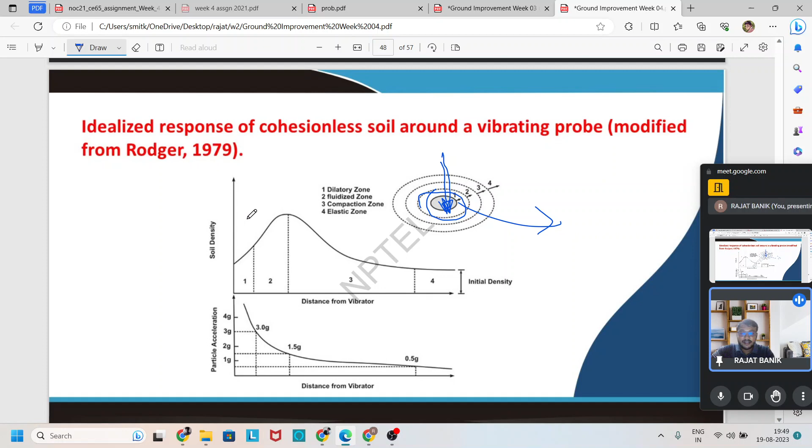Now discussing these two zones one by one. We already discussed there are four zones: the dilatory zone, fluid zone, compaction zone, and elastic zone. In the fluid zone, dry soil loses stability, but in saturated soil, liquefaction happens at high acceleration.

So when vibration happens with quite high acceleration, the soil becomes fluidized. Due to this fluidization, liquefaction occurs in saturated soil, and dry soil loses stability. In both ways, the soil's intergranular particle force is reduced and the soil particles come closer together.

Another point is that the material in the dilatory and fluidized zones is in a plastic state, while the material in the compaction zone is in an elasto-plastic state. That means the dilatory or fluid zone is associated with plastic strain — at constant strength, the strain continues to increase with no further increase in strength.

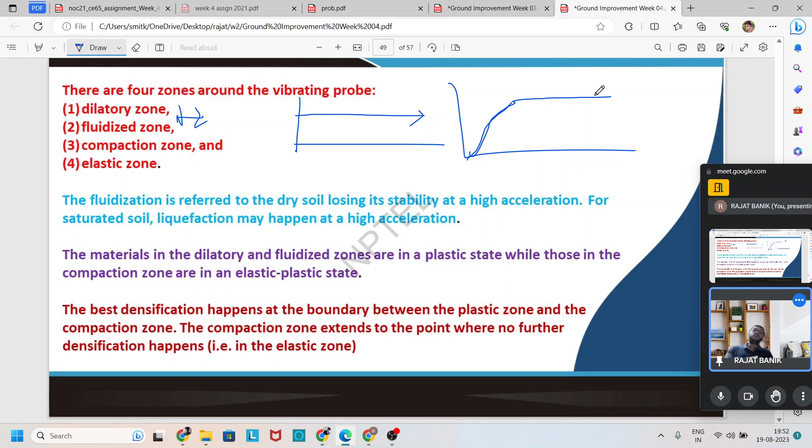Moving to the next slide, it is discussed about deep versus surface compaction. That means when we apply vibro compression at depth and when we apply vibro compression at surface, which is more suitable and why?

It is said that simulating deep compression by a horizontally rotating vibrator at depth, and surface compression by a vertically oscillating vibrator, it is shown numerically that deep compression has a wider radial influence distance than surface compression. This test is numerically shown by Arnold and Herle in 2009, clearly showing that deep vibro is more suitable, more densified, and has more influence area than surface compression.

The deep dynamic compression also generates a more uniform volume change than shallow compression. This is one advantage of deep vibro compaction. Why does this happen? It happens because deep compression attributes better performance to the multi-directional shearing mode induced by the combined vertical and rotational movement of the vibrator. That means in deep compression we apply vertical load, horizontal load, and rotational movement of the vibrator. But at the surface we cannot apply that. So the depth of improvement is not suitable for surface compaction, but is suitable for deep vibro-compaction.

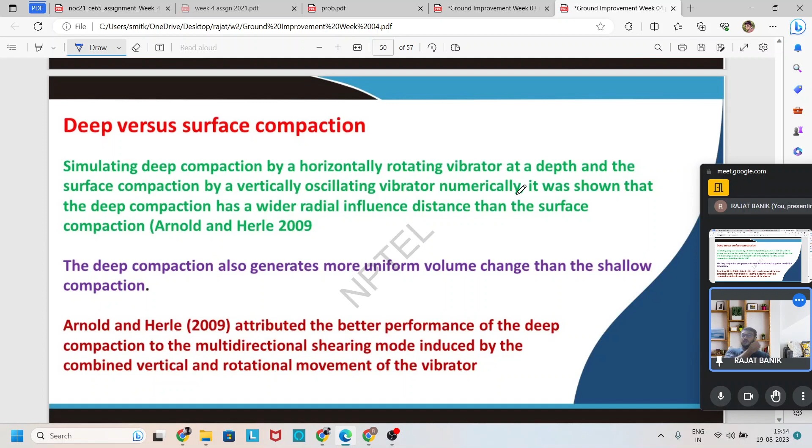In the next slide, two graphs compare deep vibration and surface vibration for different cycles. The graph is based on void ratio versus distance. It clearly shows that when we increase the number of cycles or vibrations, the depth of improvement in terms of void ratio decrease is also higher.

We can also see that the influence area is higher, from here to here, that means about 1 to 4 meters of influence for deep vibration.

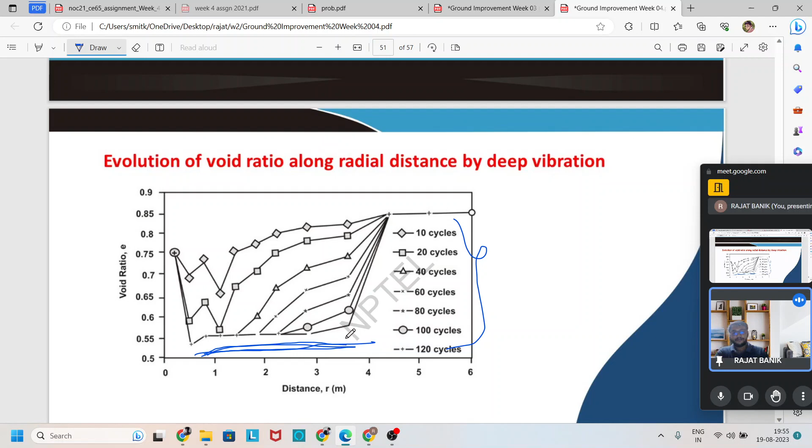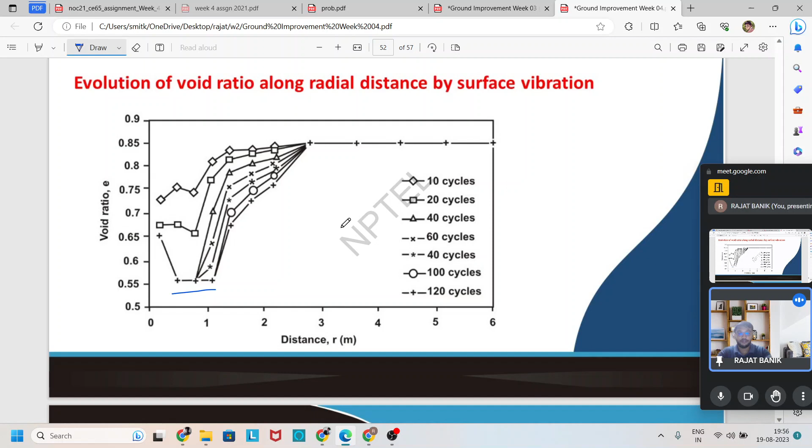But in case of surface vibration, the void ratio reduction is much less, and the influence area or distance is also less, about 0.5 to 1 meter only. So this test numerically shows it is less suitable for surface vibration, but greatly suitable for deep vibration. So why is this happening? Now I will discuss.

The installation process is such that to minimize probe shaft resistance, penetration and extraction of the probe should be done at high frequency. Massarsch and Fellenius suggest a frequency higher than 30 Hz for penetration and extraction. At higher frequency, it causes low ground vibration and less energy is transferred to the surrounding soil, making penetration and extraction easier.

During the compaction stage, the preferable frequency is close to the resonance frequency of the geomaterial mass, so that more energy is transferred to the surrounding geomaterial, making compaction efficient. Also during this process, penetration of the probe is slow. Typically, the resonance frequency of the soil is around 15 to 20 Hz.

This slide discusses that when inserting the probe, we apply high frequency. Due to high frequency, less vibration is generated. Because of less vibration, we overcome friction with the surrounding soil without disturbing the influence area at the surface, and we easily insert it to quite deep depth. Also, energy transfer is less at high frequency because the interparticle bonding at the surface is very low.

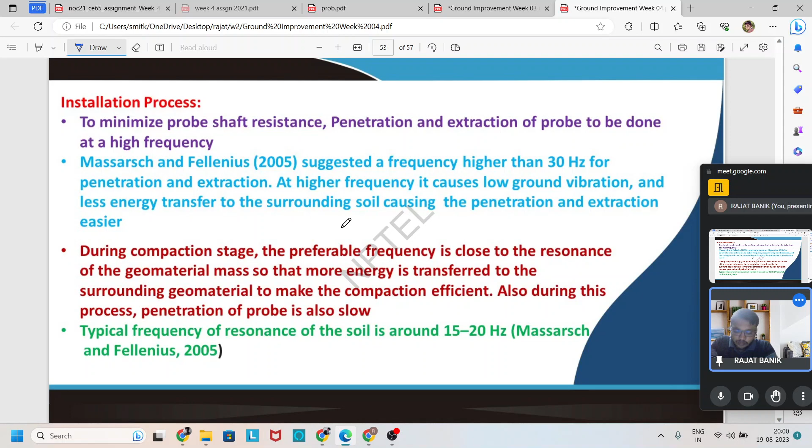So when our target is set, when inserting the probe, we apply high frequency like 30 hertz. But after reaching that point, we apply the frequency to match the soil frequency, which is less than 30 hertz, or in between 15 to 20 hertz. It is given by Massarsch and Fellenius. So when the soil frequency resonance happens, due to the resonance, suddenly the disturbance is quite large, and due to this disturbance, at same energy, we easily overcome the interparticle friction force and soil gets densified.

Coming to the next slide, it shows a schematic diagram about the insertion of the vibratory hole. So this graph shows that first we apply a 30 hertz high frequency.

We insert our probe, and at that point we go to the frequency from 30 to 15, that is matched to the soil frequency at 15 to 20 hertz, and compacting here, and after compacting we lift the probe up to that much depth.

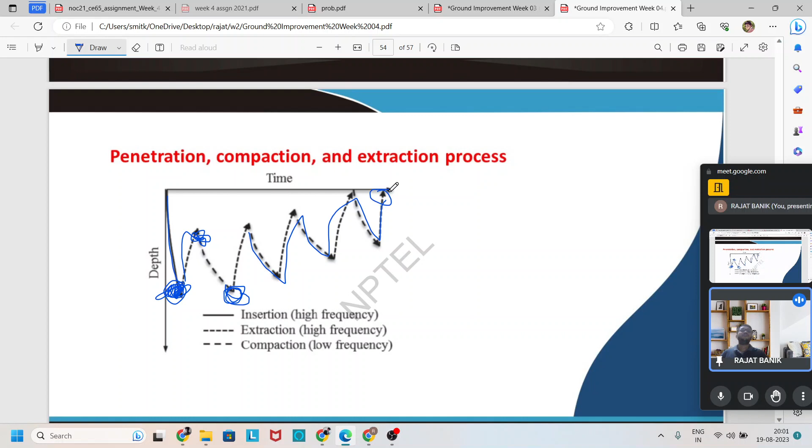During lifting, we also apply high frequency for extraction. After that point, during extraction, the high frequency also happens, and when we reach that point, we use low frequency and compact the soil to match the resonance of the surrounding soil. And like that, we keep extracting and reach the ground surface. Below this ground surface, we compact the surrounding ground and achieve our targeted value or densify the soil.